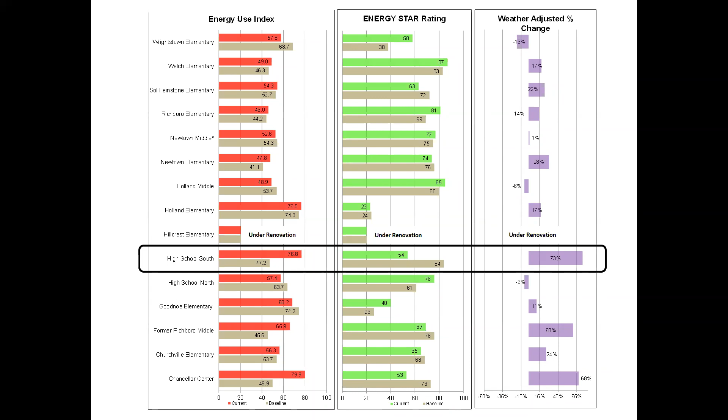One of the ways we can do that is certainly through a dashboard system. I've worked with Aramark to get a sample dashboard for South to see where these numbers may be coming from, and I'd like to work with them a little more. We're going to get a proposal from them to prepare a dashboard for other buildings in the district that we can see at any point of the day to allow us to trend energy usage, gas and electric, separate from one another. We're going to get a proposal for it, as well as maybe a post-commissioning for South.

We have a budget item for energy management in our annual budget, and it is used on an hourly basis for exercises like this, so it's something that we likely want to consider doing.

This is hard to see, but this is from the dashboard. It shows usage back 10 years ago when we had baseline indexes for gas and electric. As you move across the board, the last couple of years, the gas has really increased at South, and at strange times - we're seeing gas usage increase through some months you wouldn't normally see it climb. So we want to better understand what might be happening there, whether there's issues with the boilers, the performance of the boilers. By doing some post-commissioning work, we'd be able to take a look at that.

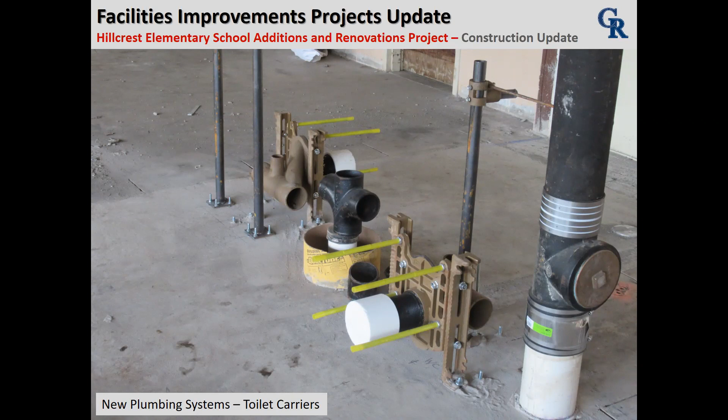Just a couple photos from the project. These are the carriers for toilets for a new toilet room. This is the large gang toilets, girls and boys toilets.

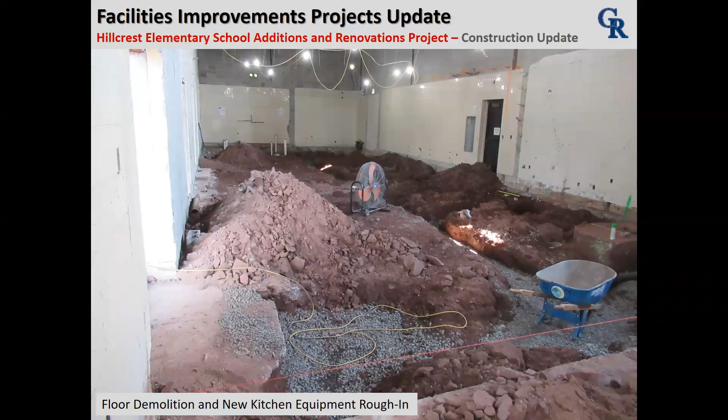One of the things we're finding here is that they did not use steel lintels or concrete bond beams, any kind of lintels, when they had big openings in walls. A lot of these walls were just spanning over where the ductwork was removed. We are going to infill these and take care of the structural integrity of the walls, but it's interesting what happened out there in the 80s.

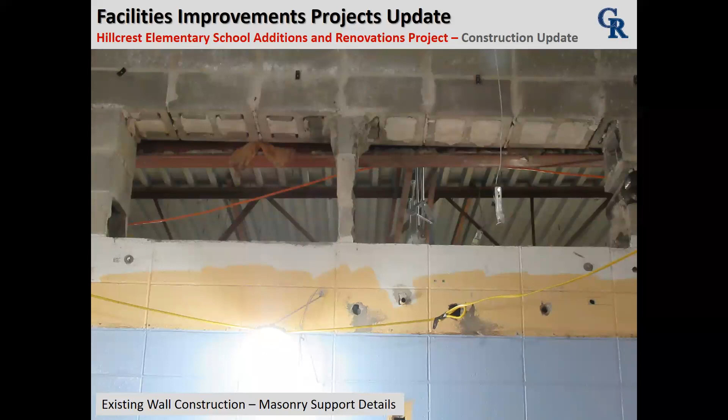This is a picture of the metal framing system in the library. Just above those window openings there's a line across the wall, which represents the flange of a steel beam carrying the wall above. But from that line to the top of the windows, the only thing supporting that block is the hollow metal window frame system. So we actually have to take that block out and rework that wall a bit. It's just not structurally sound the way it was constructed, and there are a lot of other openings we have to go back and take care of.

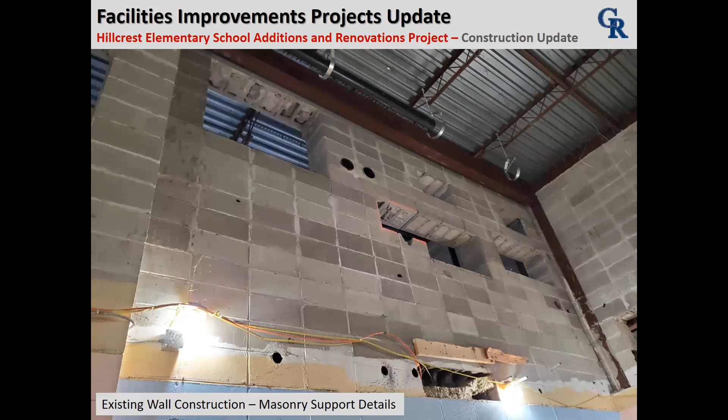Feinstone Elementary School is again moving along very well. We had the phase 1 building demolition complete. The temporary classrooms are complete, occupied, and working well. We took care of the unsuitable soils replacement. The foundations are complete in the new classroom wing, and the structural steel delivery for the classroom wing has started, with some of that steel already delivered.

The interior renovations are in progress. We have storm piping moving along, and we're putting a temporary generator in place to expedite the construction of the new electrical room.

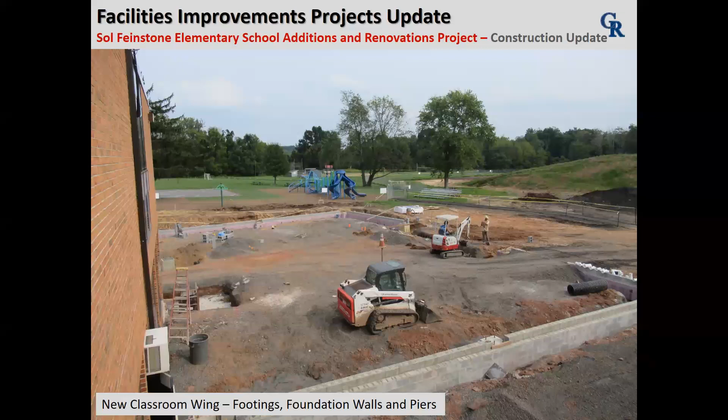Just some photos of that project. You can see this is the addition, the 13 classroom addition. Here you can see the new foundations and the base plates for the columns.

There was a courtyard back behind this 2-story wing that had a persistent water infiltration issue into those classrooms because that wall was never waterproofed properly. This project allowed us to get back into that space, excavate, put in foundation drainage, and new piping along the base of the wall that ties into the stormwater system, so we could address that as part of this project.

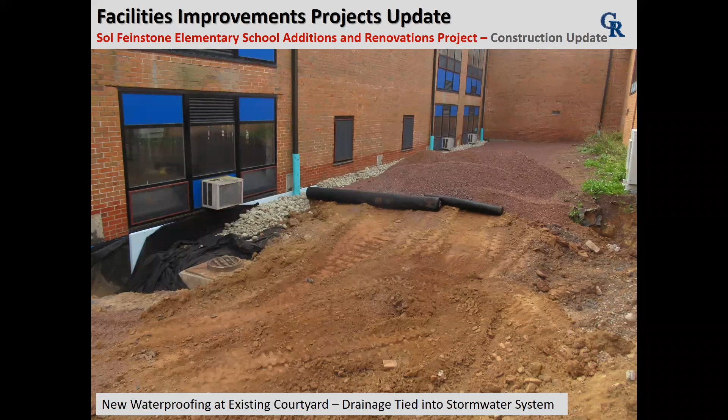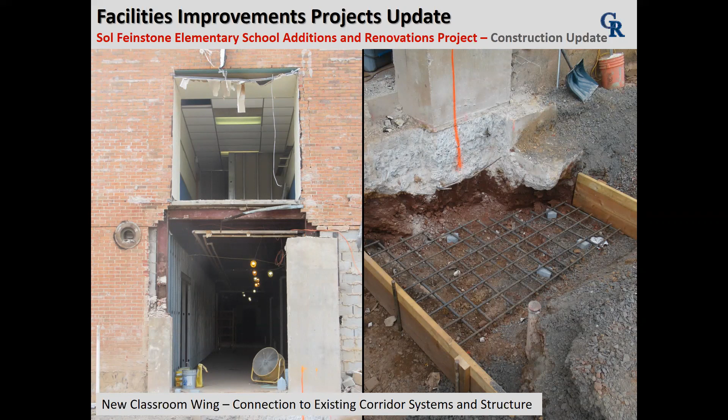This is the lower level of the building where we have the mechanical room. We've started building the new classroom spaces.

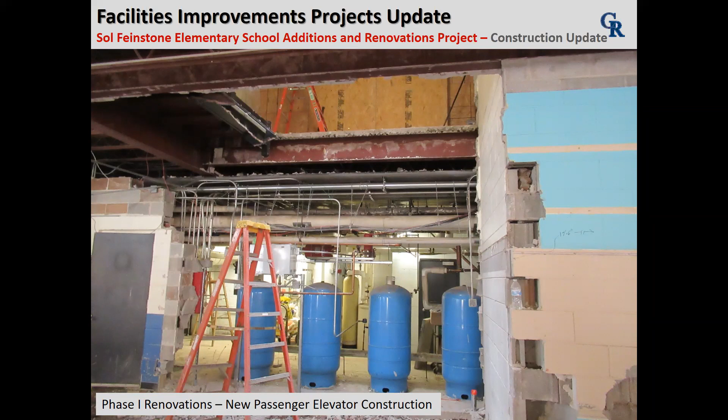South Synthetic Turf Project is moving along nicely. Another challenge a lot of owners are having is getting synthetic turf — it's difficult to get the product to your site. We were very fortunate because we moved early, beat the rush, and got the product, so we're in good shape there.

The stone base has been installed. We did infiltration testing to make sure that 20 inches of rain per hour can pass through the stone into the underground basin system that's been installed. We did multiple infiltration tests and had some challenges with the testing, but after multiple tests we determined that it is indeed okay. We're still on schedule for a late October completion.

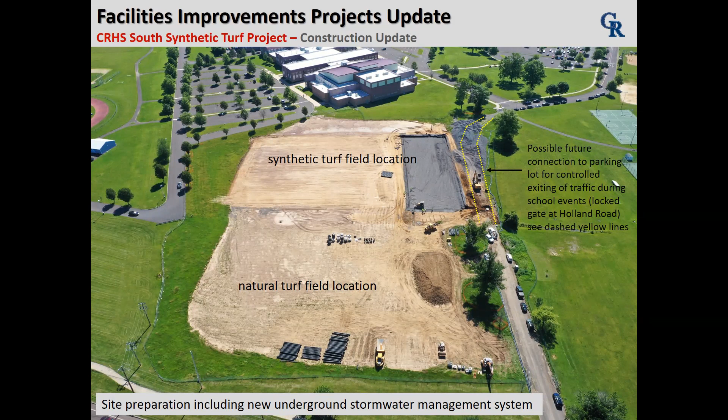We fill the outer ring with water, which allows the water to soak into the ground and create a barrier. Then you pour water into the inner ring and determine the percolation rate for that field. That's how we determine if we will meet the 20 inch per hour infiltration rate we specify. So this test is important.

It's performed at several areas throughout the field. Clients and districts that don't do this risk having a turf field full of ponding if it doesn't perform well. This is how you avoid a major catastrophe when you're putting a turf field in.

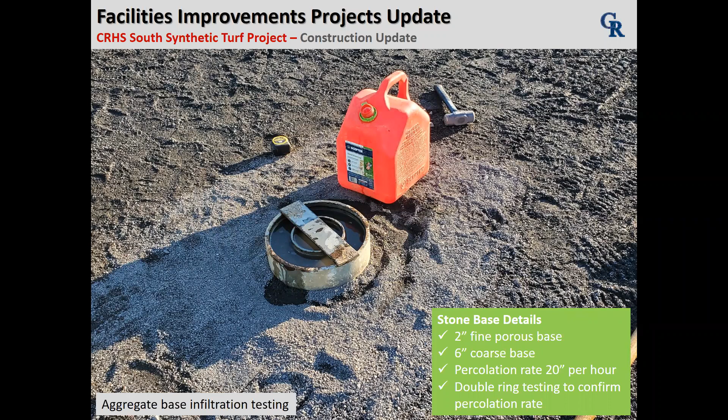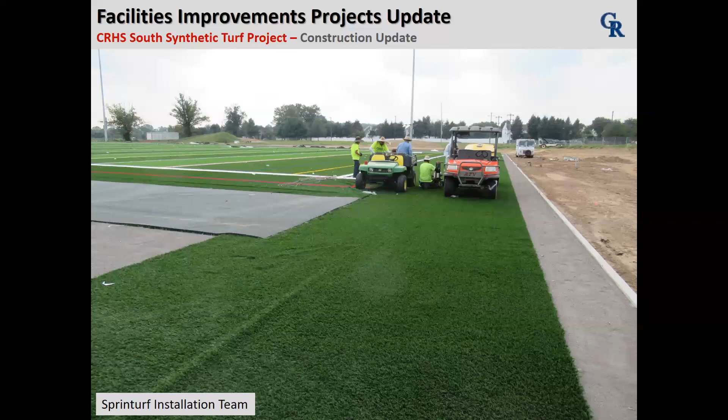This is a shot from the 50-yard line looking back toward the school. You can see the new lighting is in, and the turf is coming along. They've cut in the numbers and the hash marks, and they're starting to put all the graphics on the field now.

Capital projects, the... hey, summer. Doug. Yes sir. Excuse me for interrupting, I just wondered if this is a good place to pause for any questions. Any of the board have questions?

I was just wondering, on the Sol Feinstone project, that new waterproofing in the courtyard, is that within budget, or is that something extra?

I lost you there for a second, but I think you asked if that was included in the base bid. It was included in our project. We foresaw the opportunity to get into that courtyard and make the changes, so we were able to include that in the project, and that was bid competitively as part of the project.

That's great. So there were no big surprises at any of those three projects? No, the only surprise we had at Sol Feinstone is the change order we approved for the unsuitable soils, which were far greater than anyone anticipated. But other than that, no, we've been very fortunate.

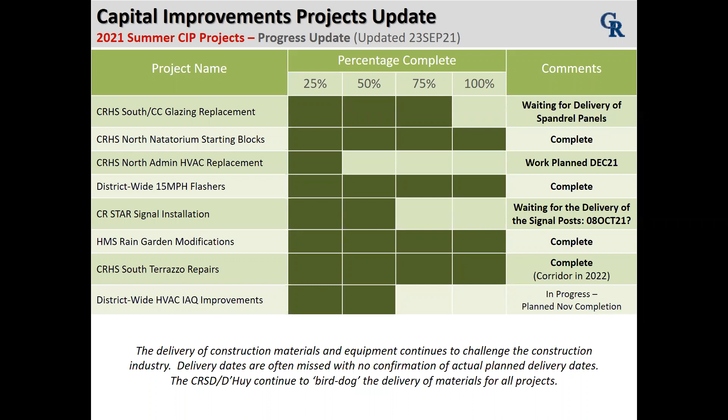This is just a percentage complete, which we really just went over. So as we prepare the plan for next year, we're looking at the budgets, and I'm working with Mr. Bruchak and Robert, and we're looking at where the budgets are. So there's really no numbers to present at this time, other than we're working on the plan that will be presented in October, and then again at a joint meeting in November.

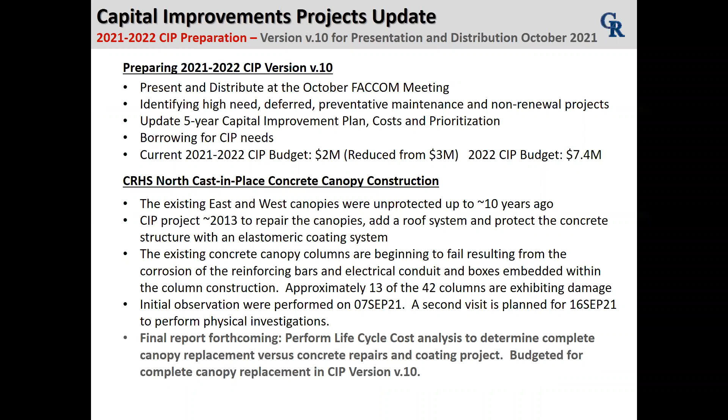One of the projects, though, that as we looked at for next year that we're concerned with is the North project - the concrete columns and canopy. And I did discuss this at the last meeting. Since that meeting, D'Huy has been out with a restoration contractor who performed some investigations to determine the feasibility of opening up the columns and repairing them. I'm waiting for that final report to determine what the cost of this project may be. So that is work in progress, but they have come out and tested a column, and it looks like a project that is doable.

But what I want to look at honestly is what the cost is to repair the columns, to coat the entire canopy, to replace the roof. It's about an every 10-year kind of project it's looking like right now, and I want to compare that to other alternatives to make sure that we're not putting good money after bad. So we'll see how that looks as I present that later on.

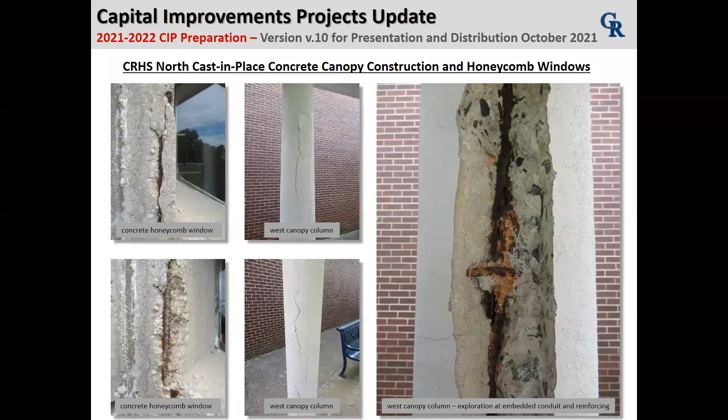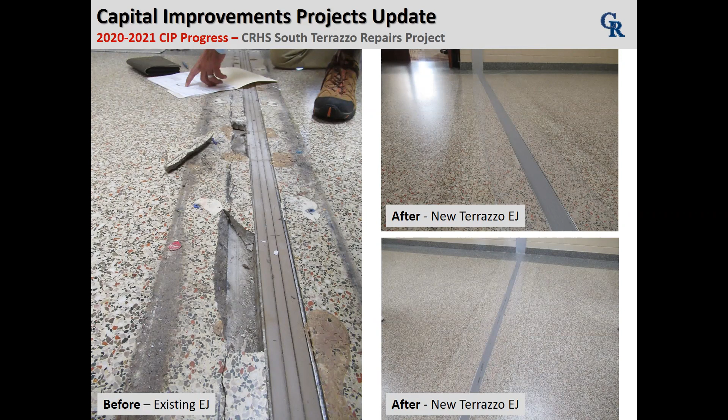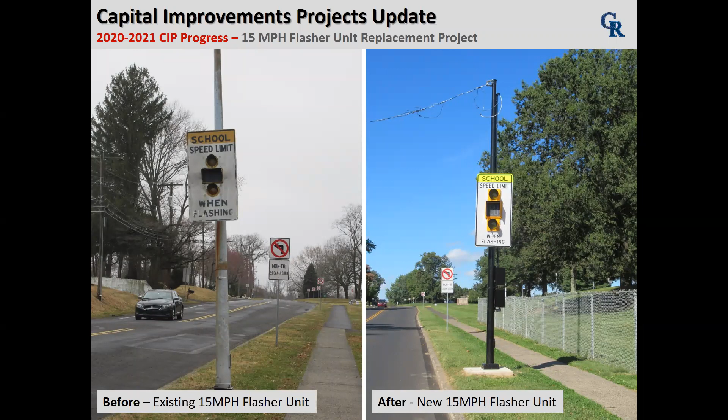The flashers have been replaced. This is an example at North of the flasher on the left and the new flasher to the right. And that's about it for summer projects.

The miscellaneous update, a couple items to go over. Lead in the drinking water - the requirement is that we either test the water each year and address the issues, or we don't test and we discuss at a public meeting, which I don't really quite understand that approach. So we have been testing before we were asked to test on this.

We did test and we had very good results. We had 129 samples collected and one was above the EPA action level. Unbelievably, it was at Star Center at a new sink faucet. So we took another test and again the faucet was above the action level. The contractor has ordered a new faucet, we've taken it out of commission, and we'll put a new faucet in and retest, but it must just be a bad product that was delivered to us.

Ongoing discussions with CRUSA. As we know, the South Field is coming on board. CRUSA currently leases the North Field. We're working with an ad hoc committee and having ongoing meetings with CRUSA. There's really nothing more to present other than we're having those discussions. They're an outside user group that we have a partnership with, and we're making sure we share this field with any other outdoor groups that might be interested in using our fields.

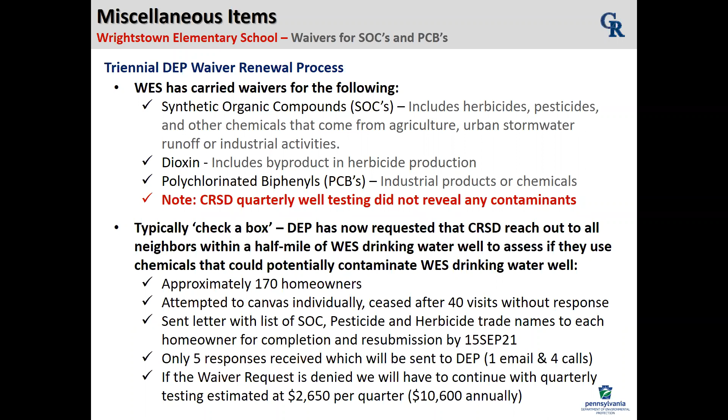So, Workplace Safety Committee: we have a monthly Workplace Safety Committee meeting. I chair that committee. We have annual certification and training for our committee members, and representatives from each school attend the meeting. We track workplace-related injuries by category, we track safety-related concerns, custodial issues, anything relative to safety. We keep minutes, we have bylaws. We do everything we believe meets the requirements of the PA Department of Labor and Industry for this committee.

By being involved in having these meetings, we get a discount on the district's insurance for complying with this. We understand from the Seltzer Group, our insurance agent, that it's not uncommon for the PA Department of Labor and Industry to perform an audit. In the 10 years I've been here, we have not seen an audit, but we were just notified that they are going to be auditing us electronically in November.

We're going to have a meeting. We provided the information that they asked for, and that audit is forthcoming. I'm just making you aware that an audit is happening in November. I'm not sure what will come of it, but I feel we've provided everything they asked for and definitely complied with those requirements.

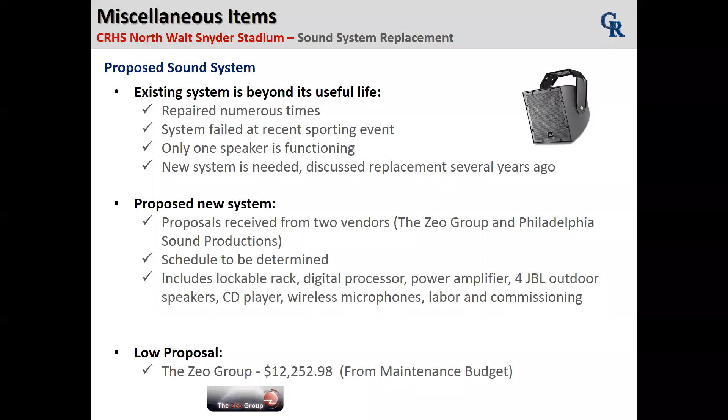Since it was on tonight's agenda, I thought it was a good time to speak about the press box. But I hope we can get it done. Thank you. Yep, thank you.

And then we go to board agenda items. The only agenda item I have for the next meeting would be the air filter maintenance bid. That is something we replace at least 3 times a year. This is for a district-wide filter replacement, so something we bring to you every year.

And then probable topics at upcoming meetings - these are some important meetings coming up. The 7th of October is the board meeting where I would bring that filter approval. The 21st of October, I'll be distributing the capital improvement plan, the 10th version. Then on 18 November, it'll be a joint meeting with finance, and we'll review the capital improvement projects, and I'll seek approval for the annual budget for the summer projects of '22.

And that is it. Are there any other questions that you guys may have? Thank you, Mr. Taylor. The floor is open.

Hey Doug, I didn't have the opportunity to make it over to Rolling Hills last night for their block party and unveiling of the school. Mrs. Marcel and I had the pleasure of walking Rolling Hills and the Star Center, amongst other schools, not too long ago. My compliments again to the team of folks you've put together to make these facilities top notch. Nothing is lost on me when we walk around them.